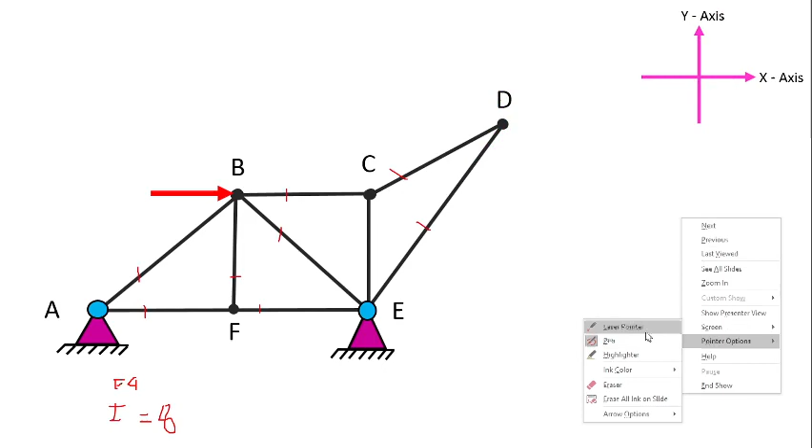So what I did here, just follow this - I have shifted this particular axis to the first joint D, and while placing this axis here, I have seen that at least one of these two is coinciding with the x or y axis.

Once again I will repeat, when I am going to transfer this axis on joint D, I see that at least one member, CD or DE, is coinciding with x or y axis. See here, this ED member is coinciding with x.

Now if you just imagine, if I apply sigma fx and sigma fy for this particular joint, is it okay? So here this is sigma fx. I am going to do the analysis of the free body diagram at joint D.

So let us see that free body diagram. What does it consist? It consists of this much part. If I assume the directions, these are the assumed directions. This is my x-axis now.

If I do the summation of sigma fx, what will be there? Sigma fx minus FDE minus FCD cos of this angle theta.

Is it okay? If I apply sigma fy, what will happen? How many forces are there available for sigma fy? Vertical component of this CD. So only one force is there, CD. So FCD sine of theta is equal to 0, therefore FCD is equal to 0.

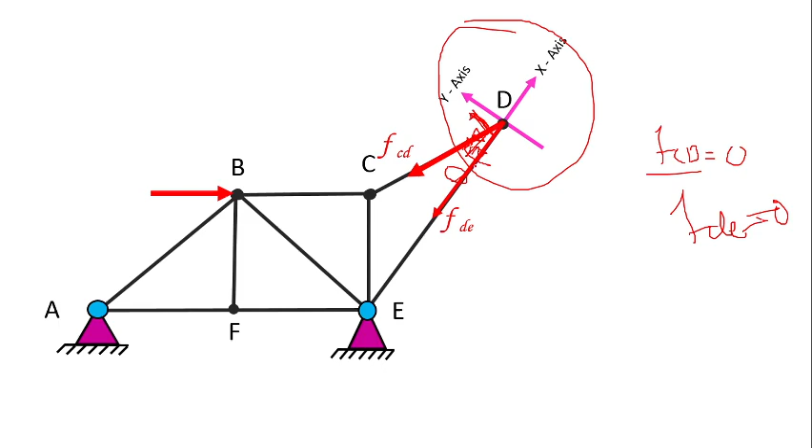This was one of the assumptions which we have already seen when we started with the trusses. So as these two are going to be 0, we eliminate this. What I did was come to know these two forces will be equal to 0 because no external force is acting here, so nothing will be transferred at joint C and joint E. So I have to conveniently eliminate this for the purpose of understanding and analysis, so I will eliminate that.

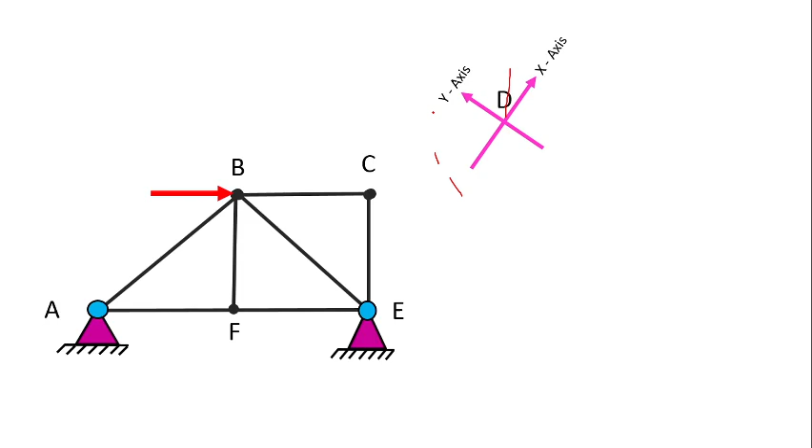After this, what do I have to do? Again shift this particular axis on the new joint. You can see here I am going to shift that axis to the new joint. Again think, is there any external force acting at C? At C there is no external load acting, so nothing will be transferred at B and E.

Means what? The forces will be 0. So I assume the direction for the forces and gave the name. Since nothing is available externally on this joint, nothing will be transferred at B and E. So force in members BC and CE will be equal to 0. So what do we have to do? We have to eliminate those two also.

So already we have eliminated 2, now again we have eliminated 2, so 4 members are already equal to 0. Next, what do we have to do? Move to a junction now where there are 3 members. What happened earlier at D as well as C joint? There were only two members. Now I am going to shift this to where there are 3 members. See here, now which will be 0?

Can you think on that? See here, these two forces, whatever be the magnitude, AF and EF, whatever may be that magnitude, they have to be equal, opposite and collinear. If I do sigma fx for this particular joint, you will come to know FAF is equal to FEF. So these forces are going to exist. But as far as this vertical is concerned, there is no external vertical force acting here, right? So this has to be 0.

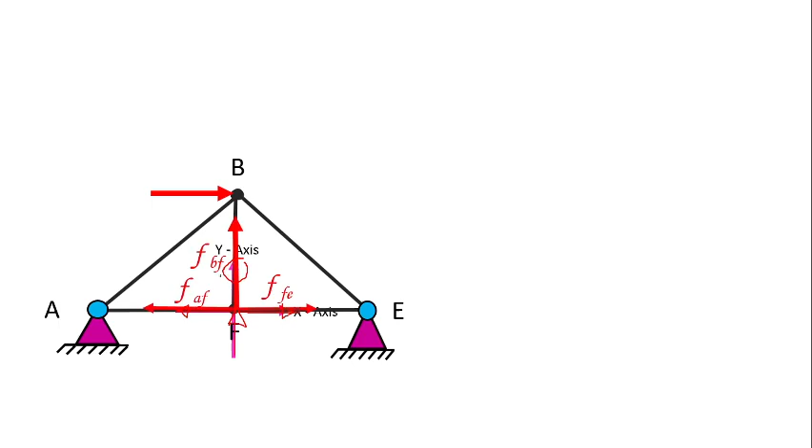Can you see this? So this has to be 0. FBF has to be 0. So eliminate that. Now you can see what we are retained with. We are retained with a basic triangular figure. So these are the only 3 members which are going to carry the forces. Rest of the members were carrying 0 force. Now tell me, if you have the idea how to analyze this particular problem, how much time you would take to solve this particular problem?

It won't be more than 3 to 5 minutes. Is it okay? Now we have gone through this total truss where there were near about 8 members. Out of 8 members, how many are zero? 5 are 0. 5 members are carrying 0 force. So once I identify those 5 members which are carrying 0 force, I can eliminate it, and whatever is remaining, that can be analyzed further now.

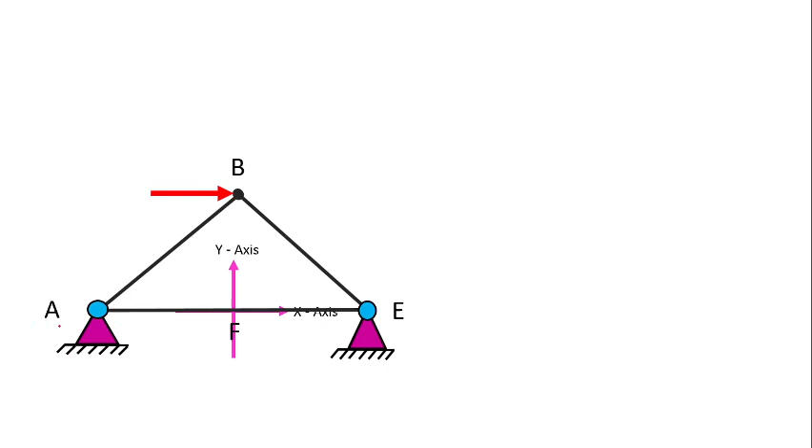Now can I transfer this axis to this? Yes, I can transfer it. I can transfer the axis to this also, but prior to that, focus on this. There is a horizontal force P, for example, which is acting here. So whatever P is acting going to act at B, part of P force will be transferred here and part of P force will be transferred here. If it is getting transferred in this member and in this member, means ultimately there will be a force here as well as here. Is it okay? If there are these members available with certain magnitude which are not 0, then definitely here also there will be a magnitude of force. Obviously they will be equal opposite, but there has to be the magnitude.

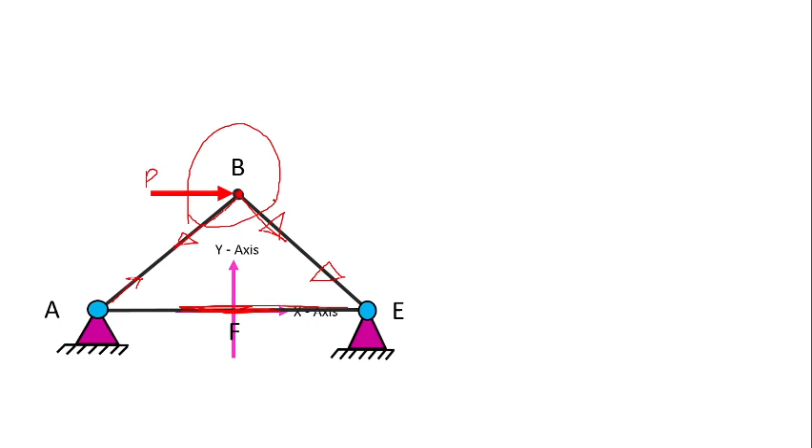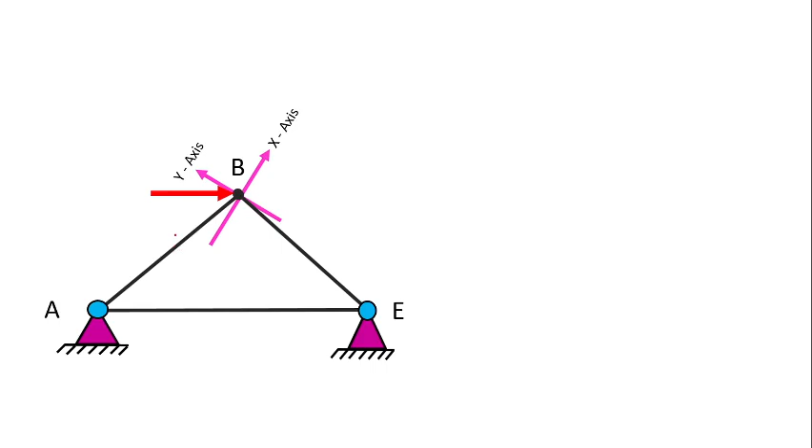Is that okay? So this is how we have to analyze the trusses when we have an idea how to identify the 0 magnitude force. Is that okay? Let us talk about some other part now. You can see we can traverse from A to E, all the members. P force is acting at joint B. So according to the assumption, forces are transmitted from joint to joint through member. So force will be transferred from here to here, here to here. Similarly,

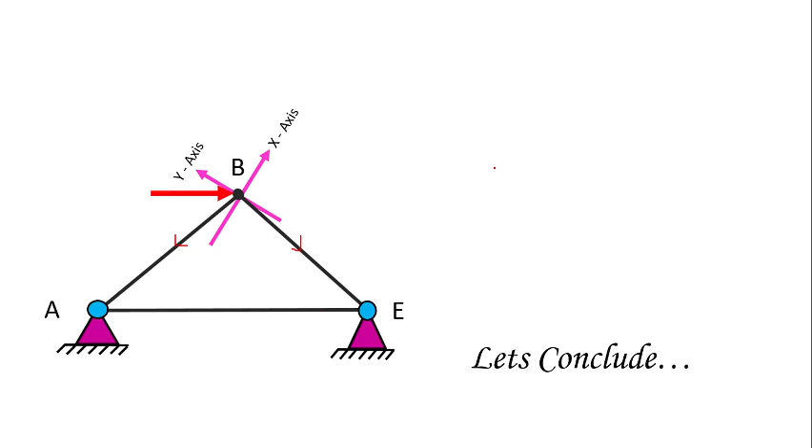Now it's time to conclude what we studied exactly in this particular truss. What were the rules which we have followed in understanding the 0 forces in the truss? So here comes the first rule. Whenever we are having a junction of 2 members, this is one junction, this is another junction. What is the difference between these two? This is right angle and here we have certain inclination. So this is the junction of 2 members, and at that junction no external force was acting. Here also as well as here also, at this joint no external force was acting. Is it okay? When this condition persists, this is equal to 0, this will be also equal to 0. This will be also equal to 0. Why? Because at this junction of 2 members, no external load was present.

As no load was present, nothing will be transferred at the far end. So this is 0, as well as this is also 0. Same is the case with the another joint. Again, two members irrespective of the inclination between each other, it is immaterial. Just for the sake of understanding, I have drawn these two figures. Otherwise, both have the same meaning. Two members are meeting at a joint. Is it okay? But no external force is acting. So nothing will be transferred at their far end, means those members are carrying 0 forces. So that is the first conclusion we have drawn out of the problem which we have seen just now.

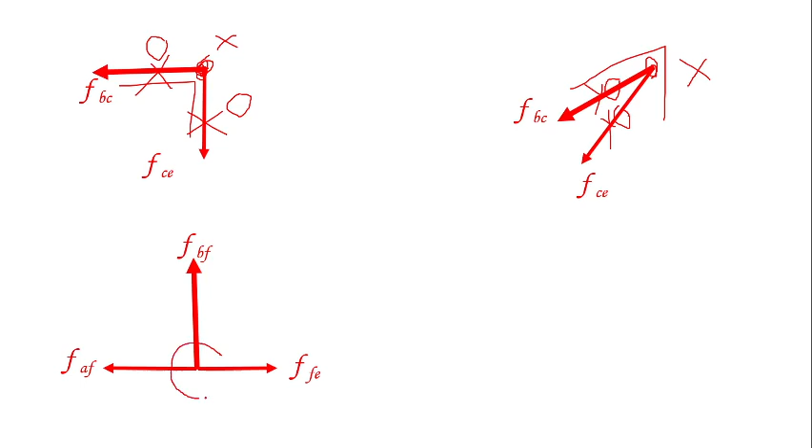Second conclusion: whenever we have three members at a joint, this is one member, another member, a joint having three members. Now in this case we have to observe whether there is any collinearity between these. So here these two are collinear, these two are collinear.

So these two will be equal, opposite and collinear, and the third will be zero. These two will be collinear, equal, opposite and collinear. Nothing is there to be shared with this inclined member or this vertical member. There is no external vertical force acting at this particular joint, nor any external force acting at this other joint. So nothing can be balanced with this BF, so no force here, this has to be zero. No force here, this has to be zero.

So this is the first rule and this is the second rule. These two rules are to be followed at each and every joint. First rule: when there is a junction at which two members are there, regardless of their inclination with respect to each other, and at that junction there is no external force acting, then this has to be zero, this has to be zero. Why? Nothing is acting here, so nothing will be transferred to the far end, so this will carry zero force. Same is the case with the second type of problem figure.

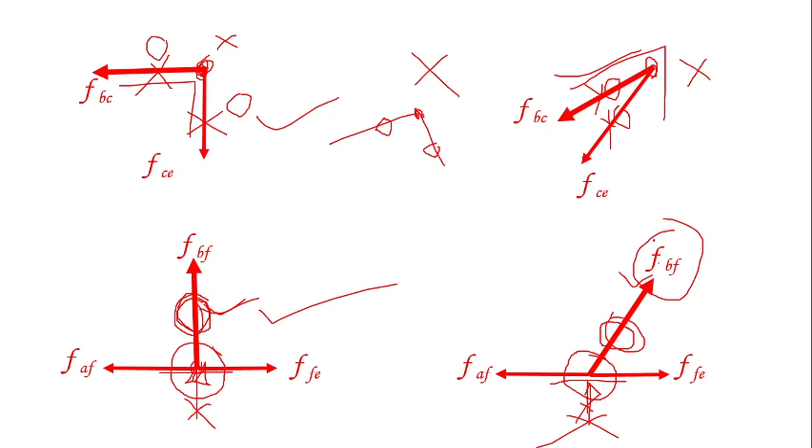In the second conclusion, if three members are at the same joint, out of those two are collinear, then they have to be equal, opposite and collinear, and the third one has to be zero. The condition is: no external vertical force is acting at that particular joint. In that circumstance, this force will be equal to zero. Similarly here, no external force was acting vertical, upward or downward, so this has to be zero. So these two rules are to be followed every time to identify the zero force members in that particular truss. So this is the idea and procedure to be followed for identifying the nil force or zero force members.

So let us talk about a new problem. Here comes a new problem. Now just go through this problem, watch it carefully. Tell me how much time will it take to analyze this problem.

There are more than 15 members and 3 external reactions. So a total of about 18 to 19 unknowns are involved, and to find out 19 unknowns it will take near about 25 to 30 minutes. So this much time is to be consumed for analyzing this particular type of truss. But if you have an idea about identifying the zero force members, once again I can claim that this problem can be solved within 2 to 3 minutes, because I know in this truss also there are few members which are carrying zero force.

So let us apply the knowledge we have gathered from the earlier problem. What we need is one x and y axis, one coordinate system. And that coordinate origin or axis is to be traversed from one point to another. While traveling, what are we going to see? We are going to see a joint where there are two unknowns or two members meeting, or a joint where there are three members.

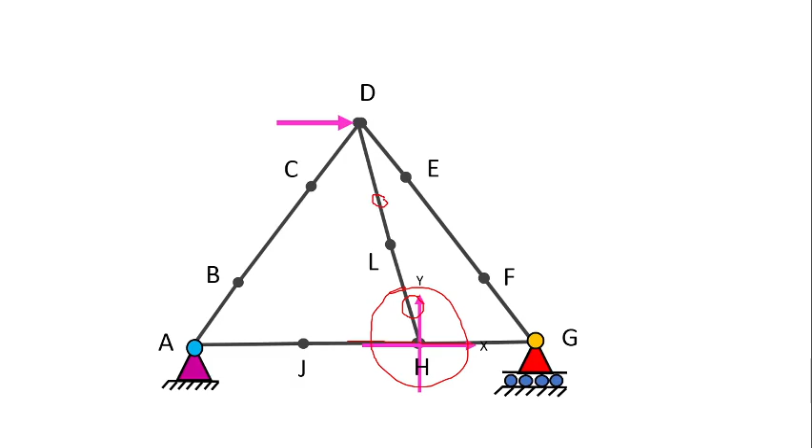Here if I consider this particular joint, this will be one force, this will be one force. So after drawing the free body diagram of joint A, I came to know that there are only 2 unknowns, AB and AJ, force in AB and AJ. These 2 can be initially found out from the external conditions of equilibrium by considering equilibrium of the whole frame. So I can find out that.

So only AB and AJ remain, and that can be found out. After finding out, don't you feel AB will be equal to BC, because they are collinear? If I know BC, which equals AB, don't you feel this will be the same? So what I can say is force in AB equals force in BC equals force in CD, because they are collinear now.

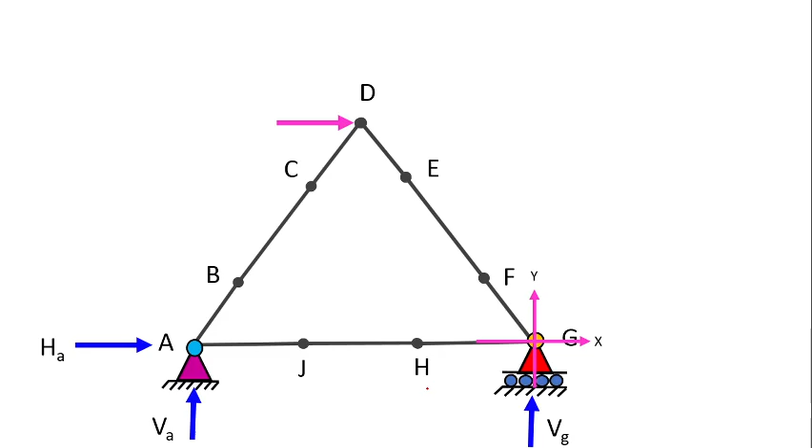After this, we can move ahead. So this was the truss, and what we are remained with is this.

You can see, as I said initially, there are so many members which are carrying zero forces. That we have proved by the simple basic knowledge of understanding zero forces.

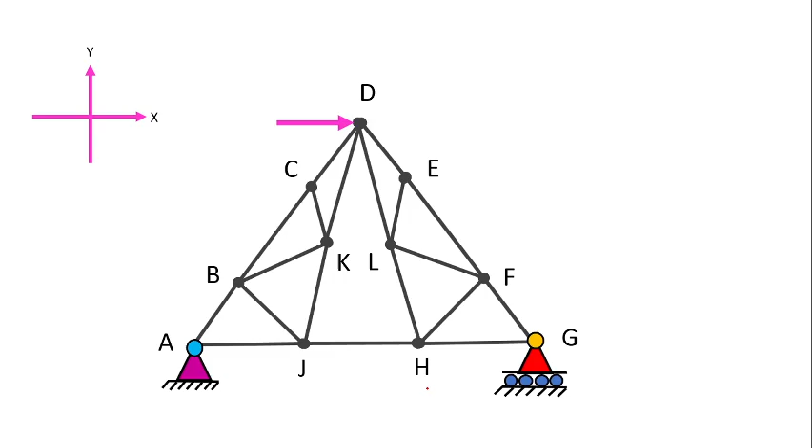Let us talk about this third truss. How many members? Near about again 15 members, external support reactions 4, so 19 members total. Again it will take near about 25 to 30 minutes to solve this particular problem. But if you have an idea to identify zero forces or zero force members, then it becomes very easy.

So on a fast track, I will tell you how it is to be analyzed. I know I have x and y axis. Shift to a joint where there are 3 members meeting, out of which 2 are collinear and the third is just a supportive member. So move to that.

So here I have found out the external support reactions by considering the equilibrium of the whole frame. So HA, VA, VJ, HJ are the external support reactions, already found out by considering the equilibrium of the whole truss. Now it comes to finding out the internal members, and especially in this case we are interested in finding out the zero force members.

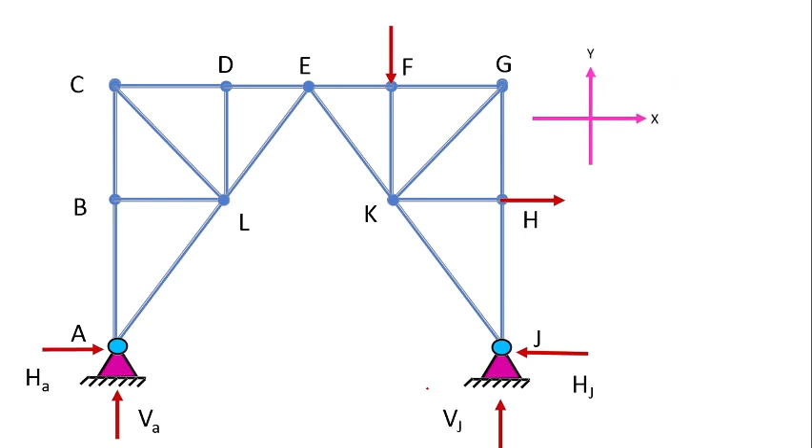So see this axis, joint B. AB and BC, how are they? They are on the same axis, so the magnitude and directions will be equal, opposite and collinear. As far as BL is concerned, it is an additional force, it has nothing to do with that particular joint. Is it okay? So that force will be equal to 0, so eliminate that.

Now search for some other joint where there are again 3 members meeting, out of which 2 are collinear and the third is just present. So which is that joint? Okay, here again 3 members are there.

That can also be understood in this case. These two, though not collinear, are at right angles to each other, but no external load is present. Is it okay? So nothing will be transferred here. Ultimately, what I said initially, if there is a force here, it will be distributed on all these 3 members, but there is nothing here. So in short, I can say this, this and this has to be 0. That we will check according to this particular rule. Already I have made CL equal to 0.

After this, the next joint is joint D. Again CD and DE are on the same axis, and DL is present as one more member in this free body diagram. So these two will be equal, opposite, collinear, and this will be 0. So eliminate that. Move to some other joint now, this one, no external load.

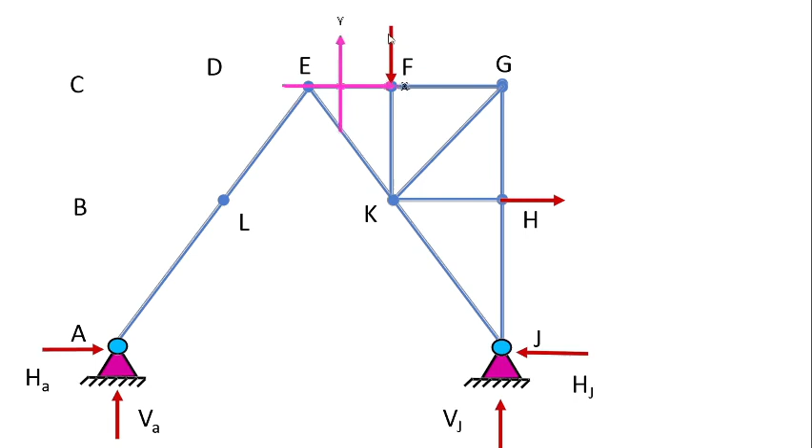Why can't I take this? You should understand that these 2 members, EF and FG, are lying on the same axis, right? So these will obviously be equal, opposite and collinear. But this one is not going to be 0. This FK is not going to be 0, because there is one external force acting here. Rather I would say, if this is acting downward, this has to act in the upward direction. If this is 10, then this also has to be 10.

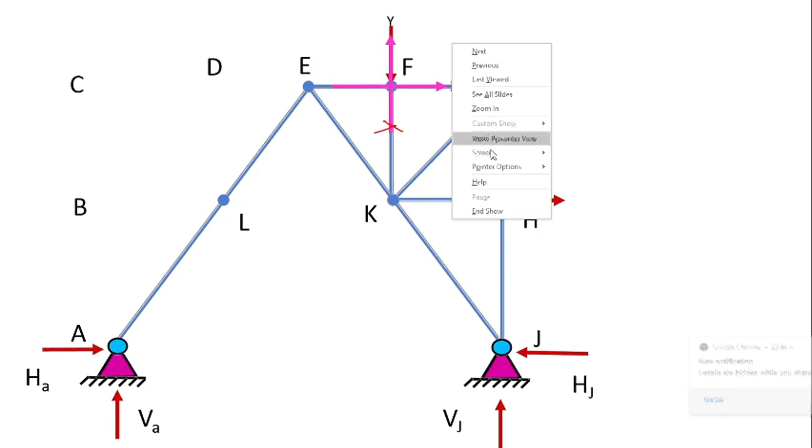Why? Again, these 2 are equal, opposite and collinear, as EF and FG are on the same axis. Same is the case with this vertical member. This load acting downward and this member are lying on the same axis, so they have to be equal, opposite and collinear. So no member will be 0 at this particular joint.

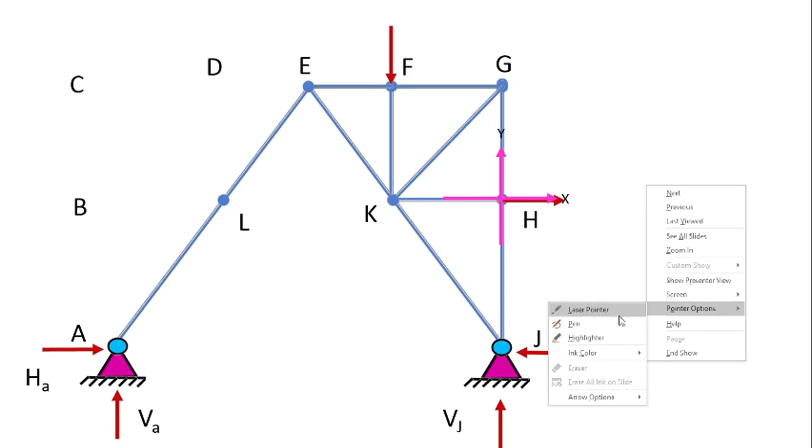Move to the next joint. Here, can I say KH is equal to 0? No. Why? Because the external force shown in red and this member are lying on the same axis, as you can see here. So these 2 have to be equal, opposite and collinear.

These 2 members, GH and HJ, the forces in them will be equal, opposite and collinear, right? So nothing is 0 in this particular case. This is how we can traverse from each and every joint, and we now conclude there is no member remaining which will be carrying zero force.

So this is the application of knowledge from the basic concept to identify which members are carrying zero magnitude of force. And once you understand those zero magnitude forces, the rest of the job becomes very simple. So this is what we can understand from this basic axis analysis of the members.

I hope you have understood this method by which we can identify the zero forces in each and every truss you are going to come across. This is very important because in the coming classes we will be coming across problems with more complexity. There will be so many members, and with this knowledge, you will definitely understand what members are carrying zero magnitude of force. That is why it became necessary to understand at this moment, and that is why I purposely took up this particular article on identifying zero force members.

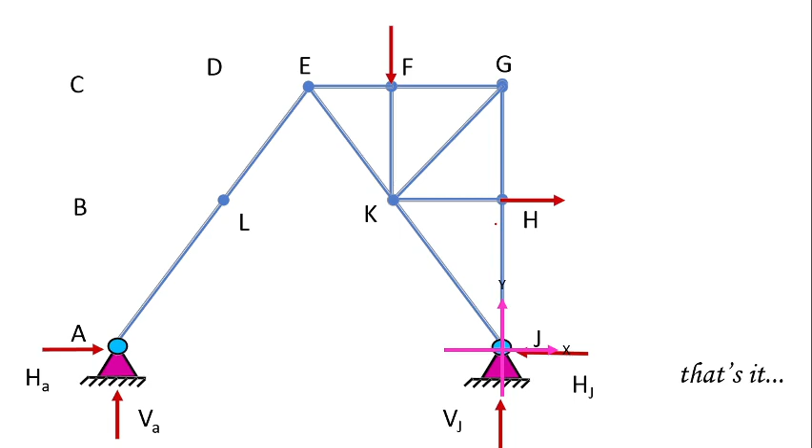Definitely in the coming classes we will be taking up problems with a number of members, and since you are equipped with the knowledge of identifying zero forces, you will be the fastest person to solve that particular problem. So with this, I think I should conclude for today. Once again we will meet with higher knowledge about this analysis of trusses by the method of joints. Thank you very much for your patient listening.